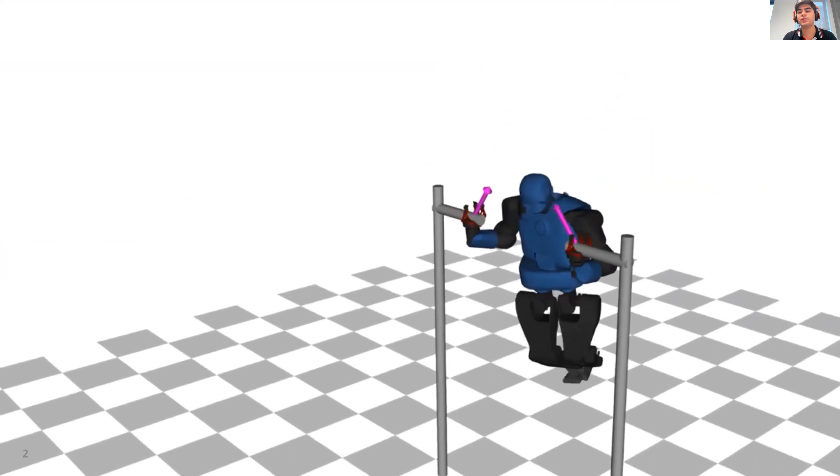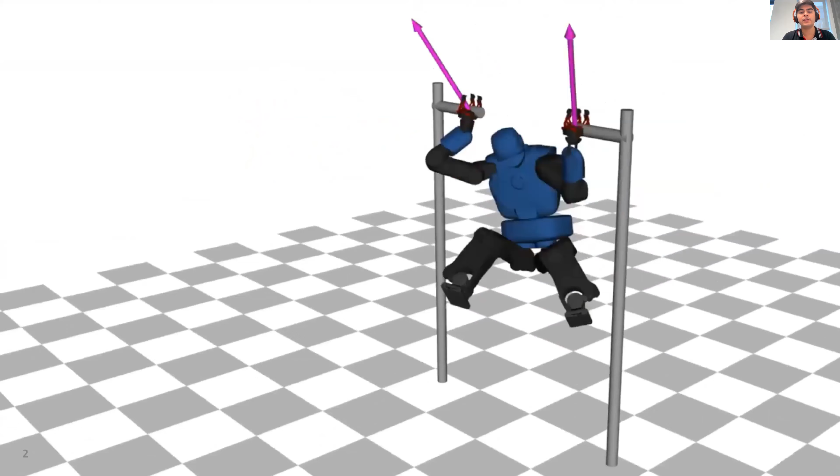I'm going to talk about recent progress on predictive control and codesign based on Crocoddyl. But before going into a boring talk about many equations, I would like to show you some results of Crocoddyl. This motion is computed based on a set of predefined behaviors. Here, the behaviors you see are: grab the bar at a given time, be in this vertical posture, and after, at another given time, be down in a specific posture. The rest of the motion, like crossing the legs, the swinging, are motions generated from first principles of optimization. I haven't put in any hint, any clue, any heuristic to make those motions possible.

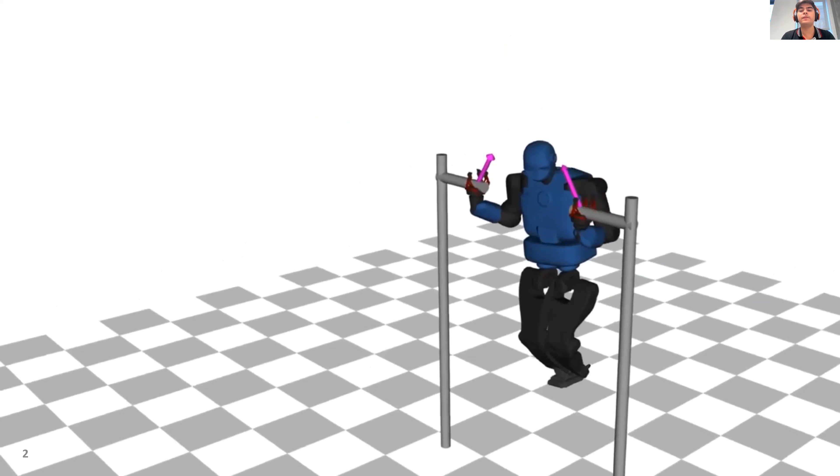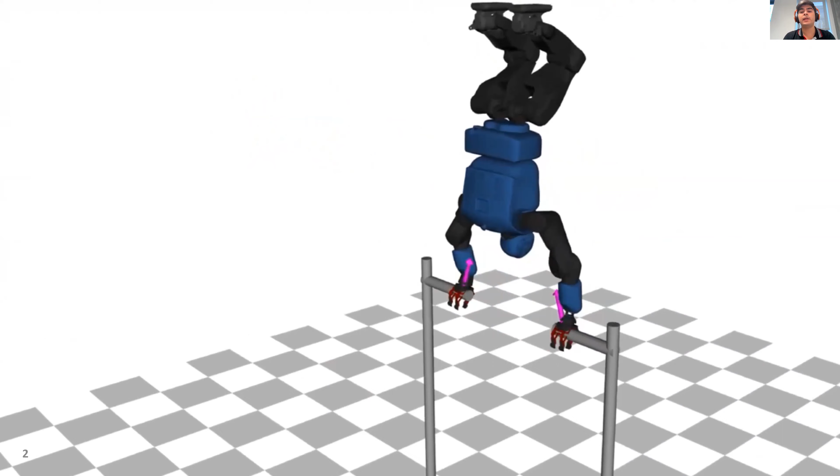You can see that Crocoddyl is optimized using the full dynamics. It's optimizing and includes the torque limits, joint position limits, joint velocity limits, and friction constraints. So it's handling many of the common constraints and models that we use in robotics, but also in other fields. I also want to show you some results from a few months ago on quadruped robots.

What you can see here is we have translated this way of generating agile motion onto the quadruped robot, the ANYmal B. Here it's a model predictive control algorithm running at 50 Hz, considering the full dynamics, the torque limits, the joint limits, much like the previous video.

What you can see here is the ANYmal jumping 25 centimeters forward. It can also jump laterally. The height is 15 centimeters. These results are possible using our full dynamics model predictive control algorithm, which I will describe in this talk.

I have prepared the following points for this talk. First, I would like to discuss the benefits of full dynamics and prediction. It might seem obvious, but among folks in my field, some have naive answers for why we should use full dynamics. I want to show a perspective on why I think we need full dynamics, not just to capture all the dynamics of the rigid body system, but also because there are messages that the full dynamics is telling us about the rigid body system.

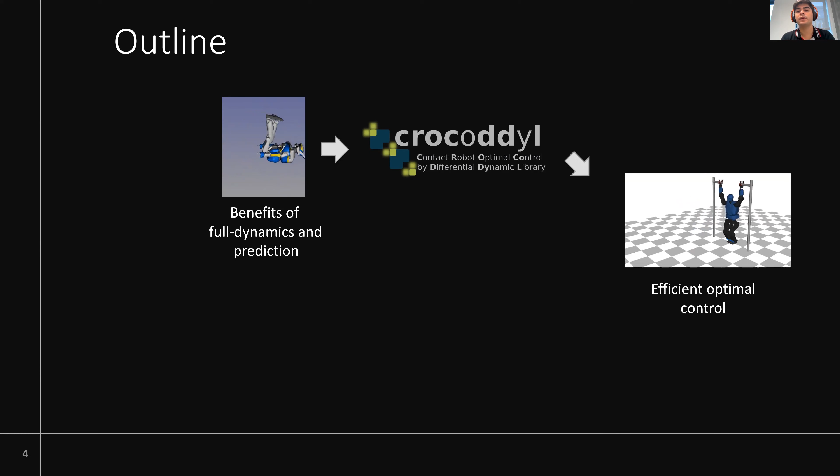Later, I want to describe briefly our hybrid predictive control algorithm, show you some results, and show you different ways that we can control this robot and the implications of that.

And finally, I want to conclude this talk with a project I'm working on: codesign. Codesign aims at designing the robot—the length of the limb, the payload distribution, the mass of the trunk, the motor dimension—from first principles of optimization. At the same time, it aims to not only find an optimal design, but also find an optimal trajectory. This leads to new ways of designing robots that might, in future, be able to generate any kind of behavior, which I'm pretty interested and excited to work on.

So let me start with the full dynamics. Of course, if you use a reduced model—let's say single rigid body dynamics, or an inverted pendulum—those models capture quite a lot of the dynamics of a legged robot, but they neglect many things. And it's not just about the full kinematics or about the way of imposing torque limits, but also about the nature of rigid body systems.

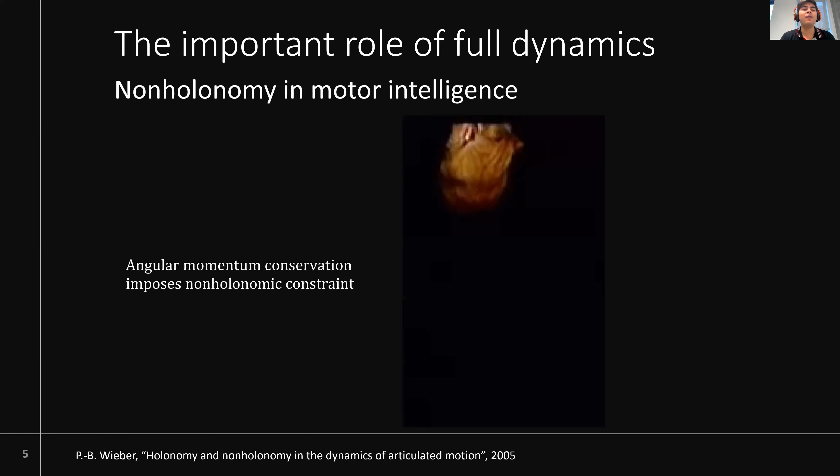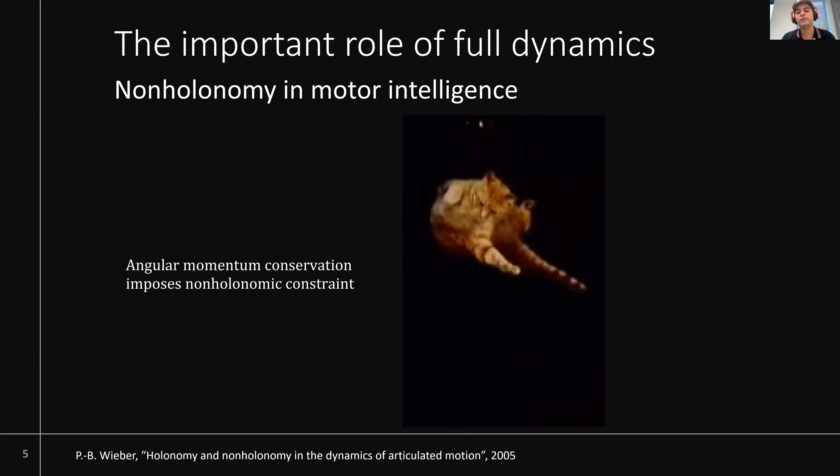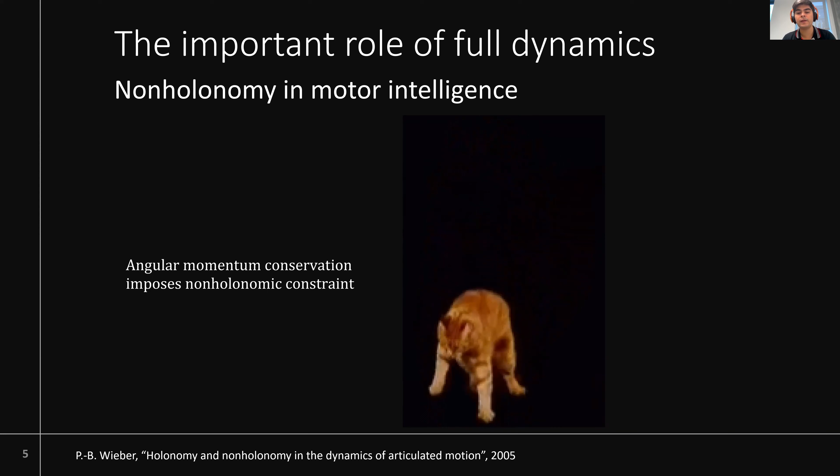I want to say that this nature is related to the concept of non-holonomic—I like to call it non-holonomic motor intelligence. This concept was introduced by Wieber in his work. Basically, in a rigid body system, when we want to conserve the angular momenta, if you analyze the equation of angular momentum conservation for a rigid body system like this cat, you will see that it imposes non-holonomic constraints. So, for instance, to generate this cat motion, what we need to do, in terms of physics, is conserve the angular momentum. What the cat needs to do is figure out a motion that conserves the angular momentum, which in this case is rotating its front and hind parts in such a way that conserves the angular momentum. But the challenge of this is not trivial.

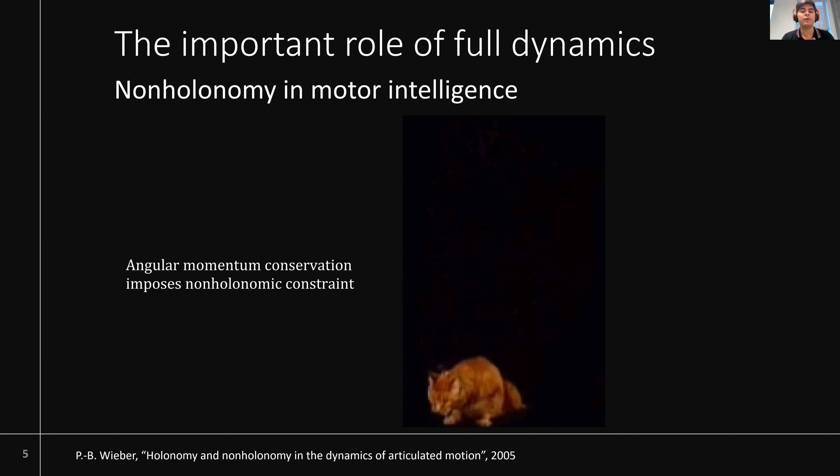I mean, there's not a trivial way of solving this because there's non-holonomicity in the system dynamics. But what is this non-holonomic thing?

So if we want to control or generate this kind of motion on a cat, or on a quadruped robot like a cat, we need to consider the full dynamics, because we have to guarantee angular momentum conservation in this motion, and there is no way to do this with state-of-the-art models using reduced dynamics. Why is this important? It's because we want to develop methods that can generate any kind of motion in any kind of robot, not only legged robots.

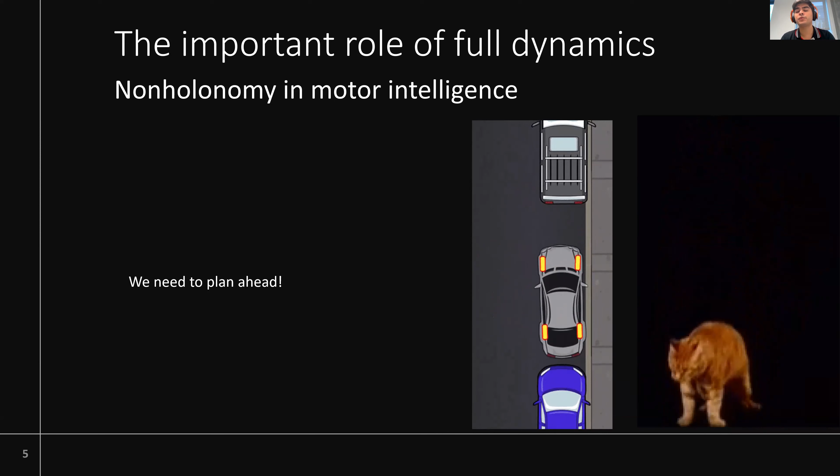Another approach in the community is typically: you use a reduced dynamic that captures your motion, so you plan your motion based on that. But later you use a controller that encodes the full dynamics to resolve some of the aspects you weren't able to handle in the motion planner. This whole body controller, or TSID, is what Andrea has presented today.

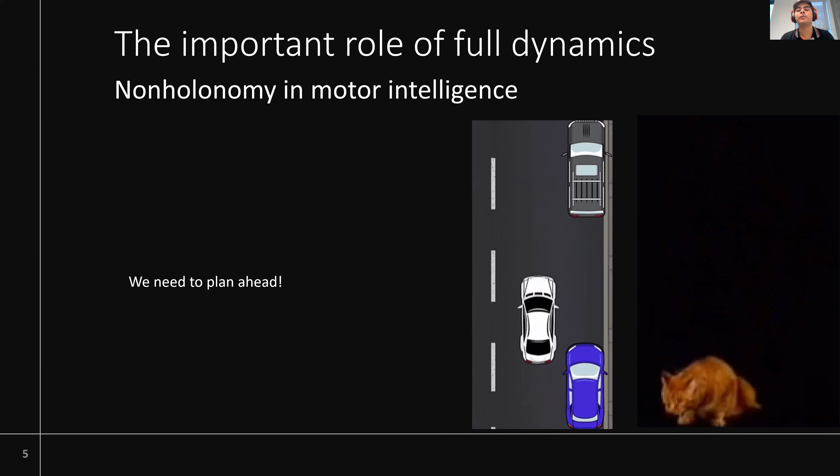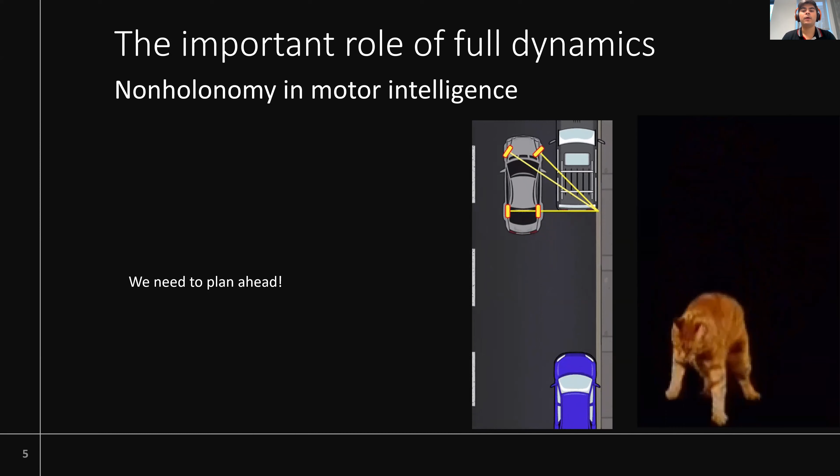But the problem is the system is non-holonomic, which means we need to plan ahead, as we do with a car for parking in a specific place. So we need to also consider the full dynamics at the motion planning level, not only at the control and execution level. That leads to a way of solving this—very classical mathematically—through the framework of optimal control. But we need to consider the full dynamics of the system.

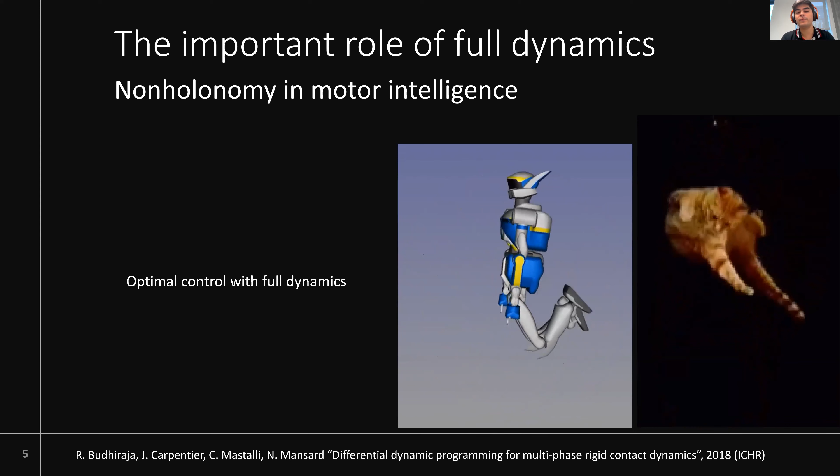What we have done here in this video is study this kind of motion, and with our algorithm we generate a motion where the HRP2 can change its attitude while keeping the angular momenta constant. This is possible because there is coordination between the two legs in such a way that we cancel the angular momenta. And again, this is a change of attitude like an astronaut, because there's no gravitational field here—we have to remove it.

So the benefits go beyond attitude regulation. It allows our robots to reach their maximum capabilities.

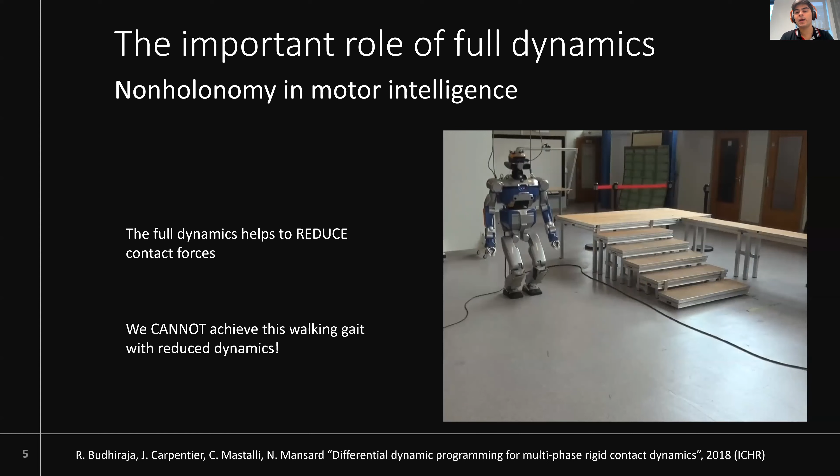And this is the starting point of Crocoddyl. We did this for motion planning at that time, but we were interested in looking at ways to scale this into reactive motion planning, predictive control, because robots are working in a dynamic environment, they have to be reactive. That was the motivation of building Crocoddyl.

Crocoddyl is an open source project. It uses a BSD3 license, so you can use it for anything. We are building a community, and we are very happy to receive your issues, questions, and also pull requests.

Some of the salient features of Crocoddyl: it supports code generation and multi-threading, which indeed helps a lot with computation time. It uses analytical derivatives, but you can also use automatic derivatives. This is, as you've seen in Justin's talk, also a very important ingredient for scaling this algorithm to the level we need.

It also has Python bindings, which allows you to develop new models and new solvers, and indeed we are using this in our daily research. So it's quite useful.

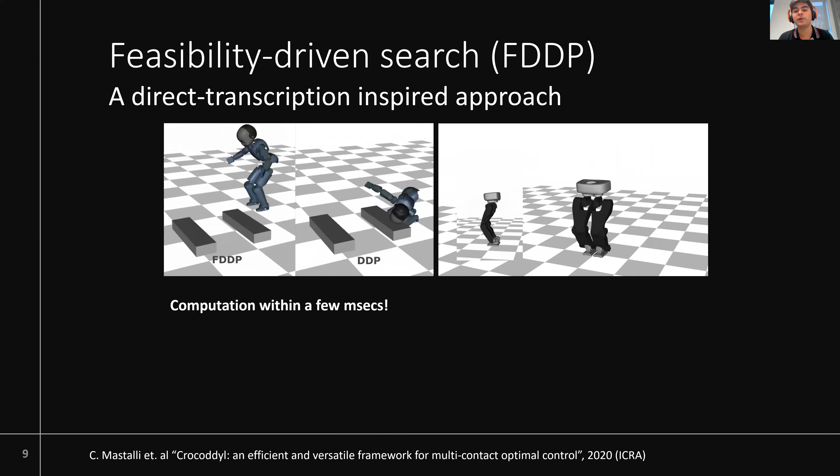Another feature I want to take the opportunity to mention is that Crocoddyl uses the manifold—we are very tied with Pinocchio on that aspect. And that's the reason why we can generate trajectories with this fluid motion that does not violate constraints.

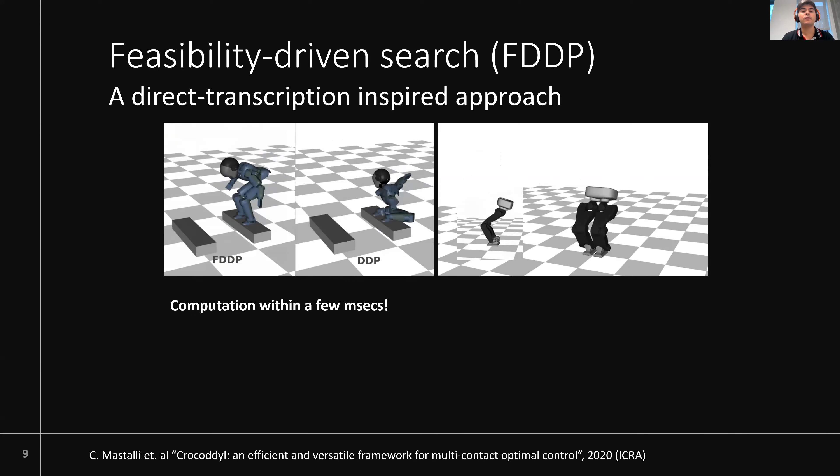Does not get into singularity—we don't have gimbal lock singularity yet. So we are working properly on the manifold.

But the concept of feasibility, to be honest, can be extended to solvers that consider other kinds of constraints. So in this follow-up work, what we do is consider torque limits and other limits through penalization, as well as constraints like the friction cone, and yet we see a surprising improvement in convergence and globalization.

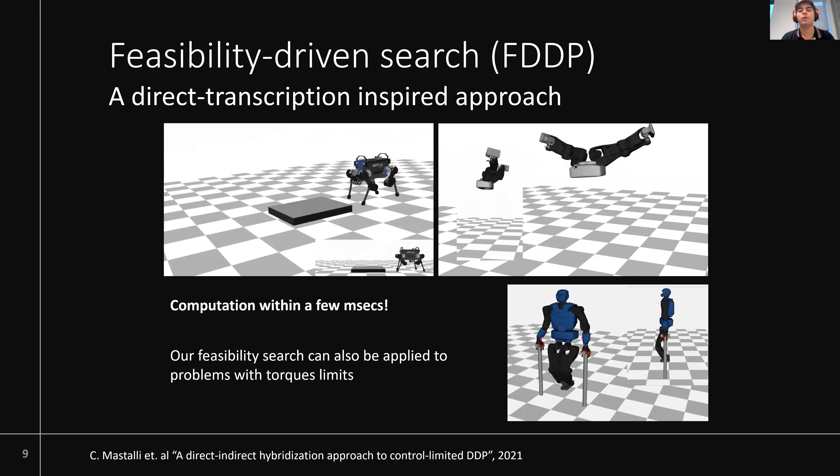And this is also the reason why you saw this video of Talos grasping the bar and doing this athletic gymnastic maneuver — it won't be possible with DDP.

Another element of Crocoddyl is the contact dynamics. I'm not going to go through what contact dynamics means in detail — I hope you got that well from Jostein's presentation. But when I say, and Jostein says, contact dynamics, what we're thinking about is this equation here.

What you can see in the first equation is the full dynamics of your system. In the second row of this equation is an algebraic constraint telling you that the contact should not accelerate. These are the full dynamics, because tau b is a compact description that contains the torque input of the joint, but also the Coriolis effect term and the gravitational vector. So this is the full dynamics, but in a compact way.

As you might know, DDP does forward rollouts to get the new gains. When you use the contact dynamics, you're rolling out and getting a new acceleration, this v dot, that is in the constraint manifold. This leads to improvement in convergence as well, because it's also helped by the connection of the feedback gain. You can see this feedback gain as a spring that is pushing your trajectory — pushing your system — into a reference. This happens when the solver is iterating.

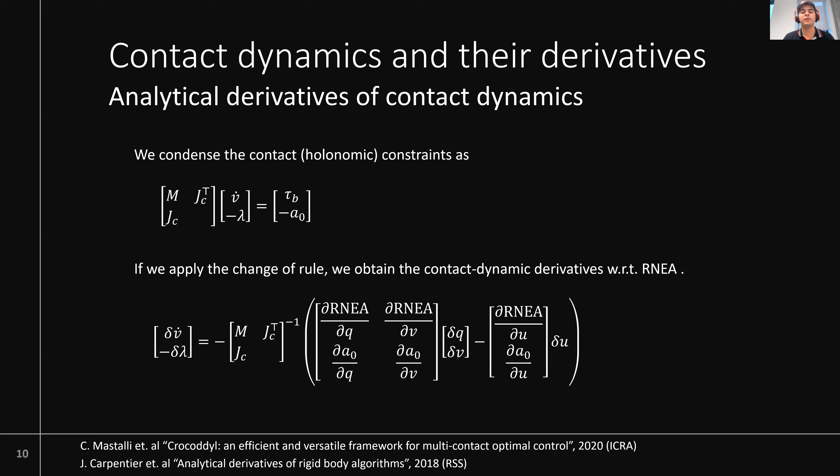So for Crocoddyl, there are many upcoming features not yet in the repository. Some of these are an efficient method for handling equality and inequality constraints. We're also working on a method that deals between feasibility and optimality of the problem — so when you cannot optimize, you solve the feasible problem instead. We have some work on differentiable optimal control solvers, related to the codesign project I'm going to describe today. We have an optimal control formulation based on inverse dynamics, some earlier work on sparse and code-generation of Riccati recursions, and we're also working on parallelization of the backward and forward passes in some technical way. So that's everything about Crocoddyl — you might think of Crocoddyl like the physics engine for your predictive control algorithm.

Here I want to present what I call Caracal. It stands for Contact Phase and Rapid Model Predictive Control Algorithm. What Caracal does is assume a set of behaviors that has been predefined — it can also be planned by, say, mixed integer programming, or come from a deep neural network, whatever. You can think of different ways of doing this, but at the moment we predefine this behavior.

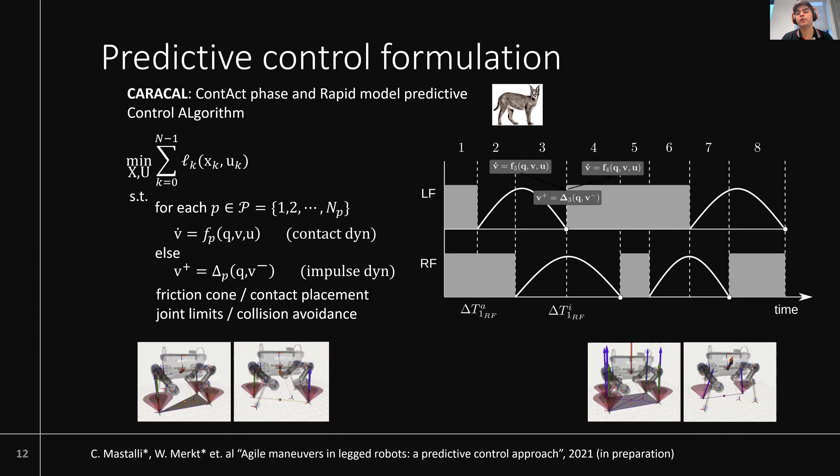So these are the kinds of motion that we can generate. We can generate any kind of gait. This walking gait is actually a fast walking gait because we have two legs in phase that only touch on contact.

But we can generate trotting, pacing, jumping gaits. We can also climb more efficiently the stairs that are high, and that is easy to reach torque limits. I will show you some experimental results on that.

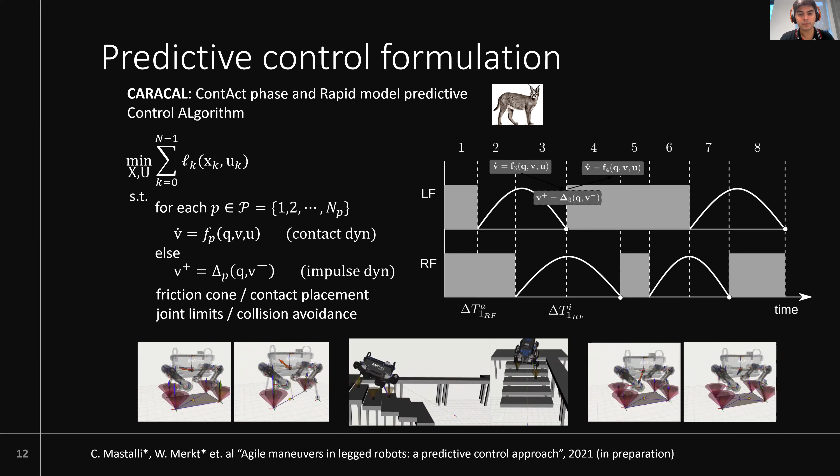So before that, let me describe a bit more about the predictive control pipeline. We have a full dynamics MPC that runs at 50 Hz, although it can run even 3 times faster, but we haven't seen any benefit from that. We just decided to use a good laptop rather than going to a more complex CPU.

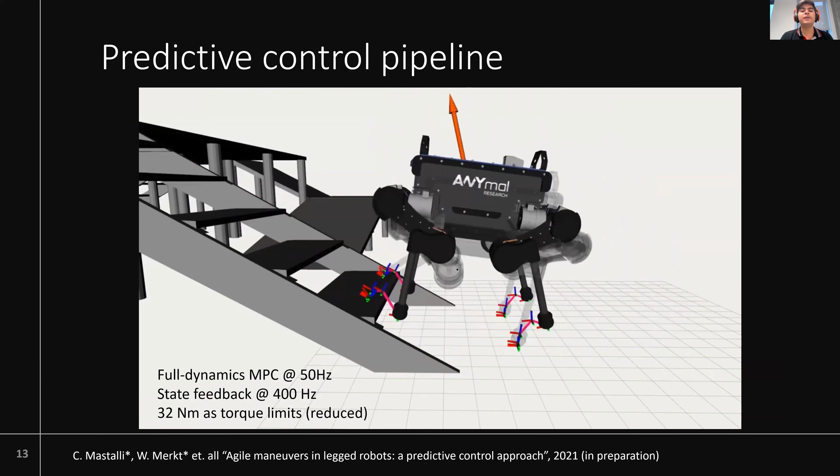Another thing you can see in the simulation is a state feedback controller, which runs at 400 Hz. This state feedback controller is actually computed by the same first principles used for trajectory optimization, because these are the feedback gains that we compute with DDP.

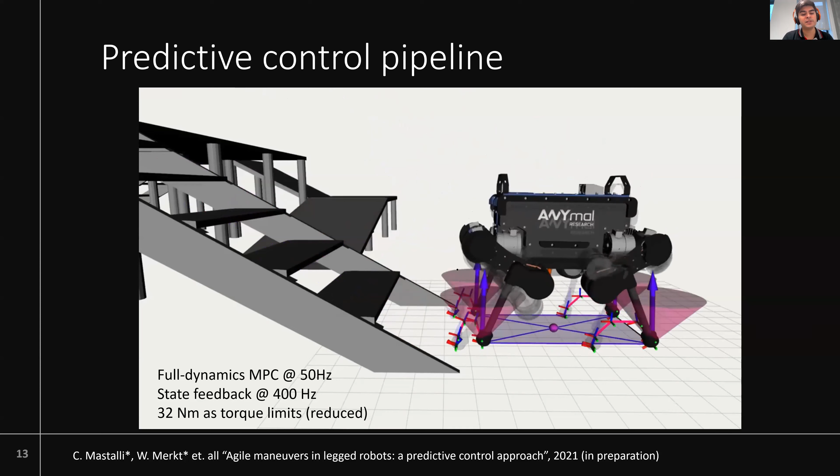This particular motion, although it might look very aggressive and perhaps not feasible on the real ANYmal, I will argue is quite feasible, because I have intentionally reduced the torque limits of the ANYmal to 32 for this simulation, 32 Newton meters, which as far as I understand is lower than the ANYmal B torque limits.

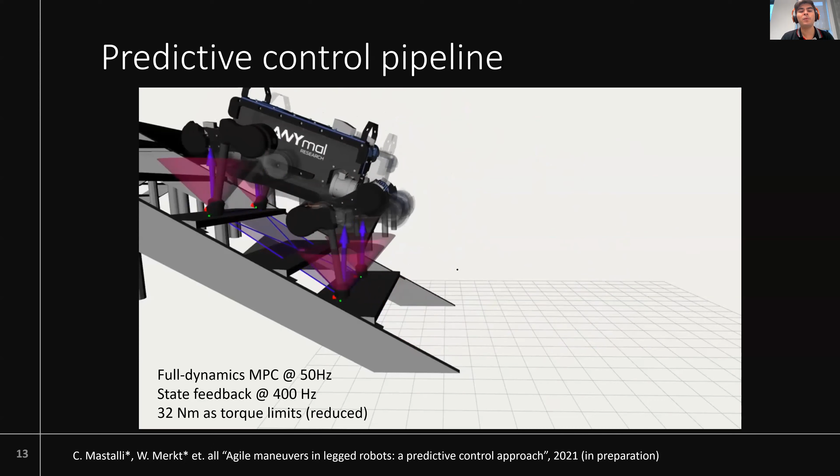Another thing you can see is how the MPC works, and you can see this shadow posture. This is the target posture of the robot at a specific instant of the predictive control, actually in the terminal state. You can see how the swing trajectories are updated, almost updated very quickly. This shows a bit how fast our algorithm converges, in really few iterations.

These are some experiments that I did around half a year ago. I still put them in because I wanted to show you a bit of the tracking without going to more complex motions. You can see the ground reaction force tracking, where the purple is the current one and the green is the desired contact forces that the MPC is planning.

So I also work in different control pipelines, and I'm going to talk a bit about this. This might also be interesting for many of you guys.

So what we have is a full dynamics MPC. Typically, as many people like, for example, Majid presented before me, what you want to do is have a whole body controller, a TSID algorithm like the one Andrea presented, to track instantaneously a set of reference tasks. These references are typically CoM motion, swing motion, sometimes centroidal momentum, sometimes body orientation, and contact forces, depending on the assumptions in your MPC. But we can supply all of this information because we are using the full dynamics of the system.

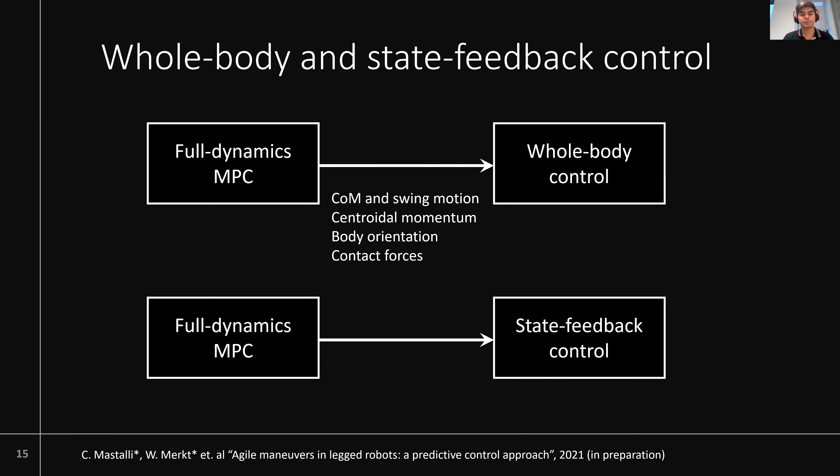On the other hand, you can have what I call the state feedback controller, what I presented in the previous simulation. So the MPC is providing a set of desired states, feed-forward torque, but also feedback gains. What you can see here is the first architecture, at the top, is like a real-time motion planning architecture, but at the bottom is a real-time motion control, because now we are not only computing optimal trajectories, but also, using the same first principles we use for computing the optimal trajectory, we're computing the optimal local policies.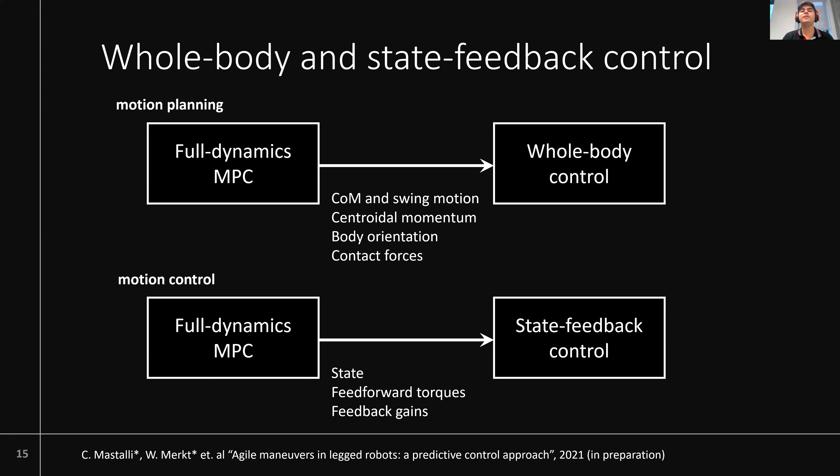This indeed leads to different robot behavior. This is a walking gait. In the top video, you can see that the motion of the trunk is quite static, not much pitching angle, but at the bottom it's completely different. You can see the robot doing a lot of pitching. It looks less intuitive, but this motion is reducing the torque limit, so I think it's an optimal motion.

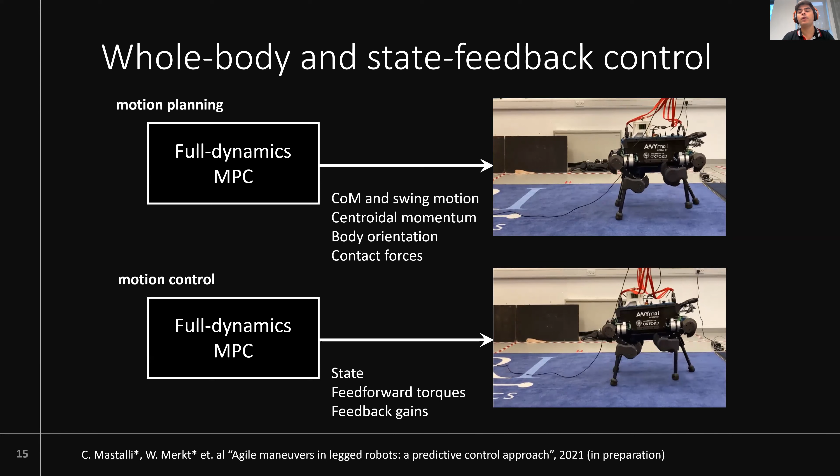But apart from that, we might argue, what is optimal? What I wanted to tell you is that when you use a whole body controller and hand tune your gains, you are actually hand tuning a local policy, which is different from the policy computed by the optimal trajectory. So there is some disagreement here, and this also motivates why we should use DDP, not only for computational aspects, but also because we can devise motion control architectures where we don't have this conflict between whole body controllers and full dynamics MPC.

Other work that we have been doing that is also a particular feature of Crocoddyl is this control parameterization and higher order integrator. More about control parameterization, let me tell you a few insights about this.

You might see a Runge-Kutta integrator performing different computations in several nodes. If you think about Runge-Kutta 4, you can have four chunks like this, but all these are computing one single unit. Because we are using direct collocation, this can be parallelized, but there's not a free lunch here. It's true you can parallelize this, and for the same time horizon have fewer nodes, but you will have nodes that are larger with larger system dimension. That will increase the computational time.

But there is a point where there's a good trade-off that you can still gain speed on. This depends on the robot you are using and its dimension. There's not a unique answer for every robot, but there are some benefits. The problem is now you have the control that has a longer duration, like 4 times if we're talking about Runge-Kutta 4.

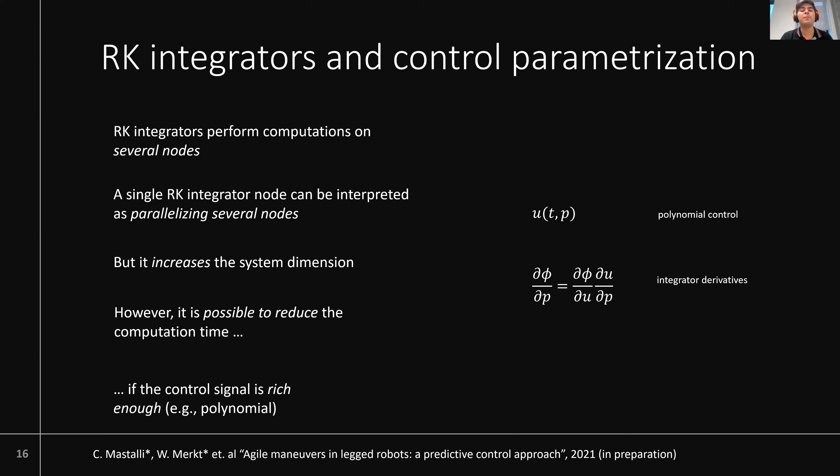You don't want to use a piecewise constant control on that, because it won't be nice to run on a robot. So to create a smoother motion, what we have to do is introduce the notion of control parameterization, so then we can optimize instead of piecewise constant signals. We optimize some parameters of this polynomial curve, and this can be easily done by just applying the chain rule, as you can see in this equation.

So how do you change our optimal control problem? This is the vanilla optimal control.

Carlos? Yes. Sorry, I think your time is done. Do you want to wrap up? Yes, I want to wrap up quickly. Yeah, it's been 45 minutes now, exactly. Okay, sorry for that. So let me try to wrap up in 5 minutes. Is that okay? Sure. Okay. Also, yeah, less would also work. Okay, I will try less.

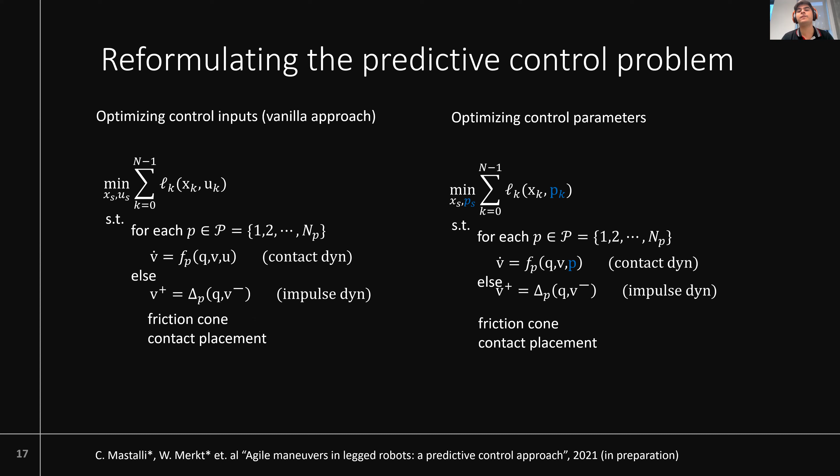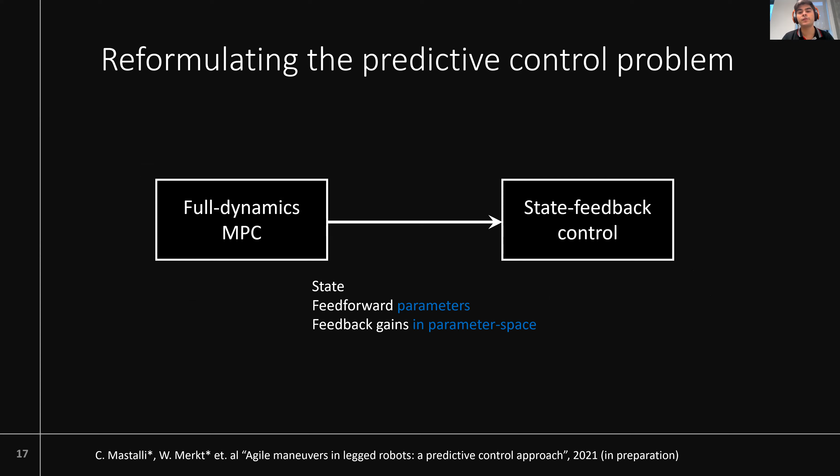So this is the vanilla optimization problem, and now this is the problem optimizing the control in parameter space. This also changes the way that we control the system, because now we have feedforward parameters in the parameter space and also feedback gains. And here are some videos.

Especially I bring this video because there are many wrong things happening and still the NMPC is working on handling it. The ANYmal robot missed three steps, and then it gets this weird posture with a small support region, and still finds a solution that keeps the torque limits.

These are other videos where you can see the ANYmal jumping 6 times. This might look trivial, but it is not a trivial problem, because you need to land in a specific posture to be able to do the next jump. This requires quite good convergence and efficiency, and also execution, the state feedback control, a good execution. So this would be very difficult to generate with a whole body controller.

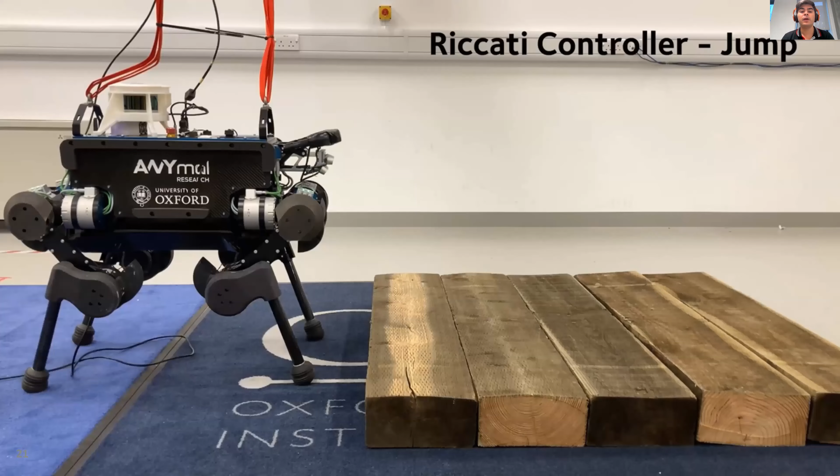These are other motions where you can see the ANYmal jumping, twisting 30 degrees. There are some errors due to state estimation, which is quite challenging during the flight phases, but still NMPC can handle it. We can also go over obstacles, over this pallet with multiple jumps. Again, this is possible thanks to the full dynamics and the use of the state feedback controller as well.

Yeah, I think I could stop here. I don't have time for talking about the codesign project, but I would like to.